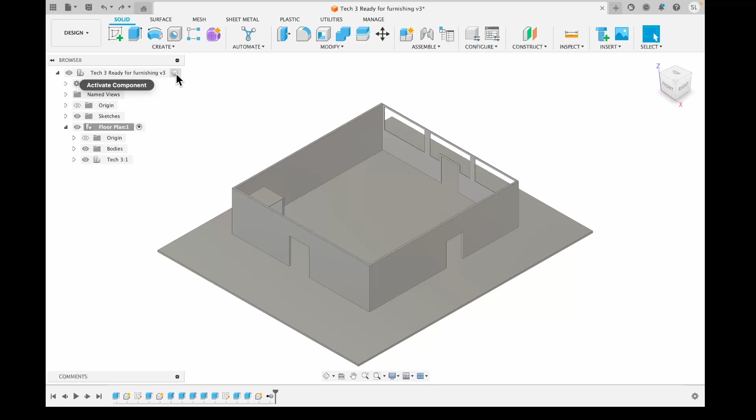We want it to be its own separate thing. So I'm just going to undo that real quick. Select this top button here, and that's when you're going to press new component. I'm going to call this first one desk.

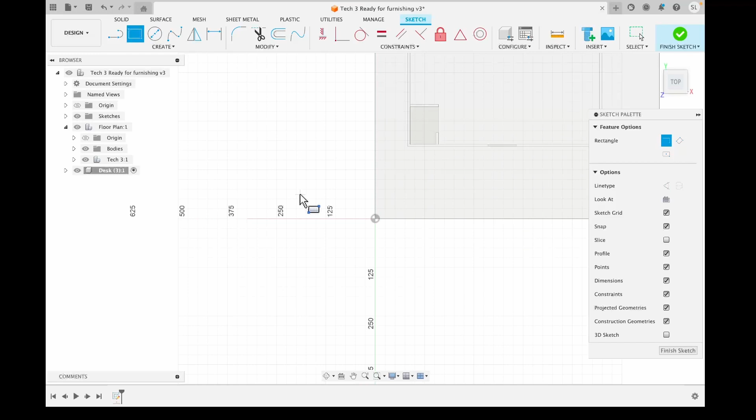Now it's its own component, and I'm going to start making a sketch from the top. The dimensions for the desk I'm going to make today, with a 2-point rectangle, are going to be 36 inches by 42 inches. I'm going to extrude that by 31, so I'll press the letter E, select my shape, 31. That's it for the base.

Then I'm going to put the tabletop on top of it. So I'm going to create a sketch on top of my table. I'm just going to do this so you can see better.

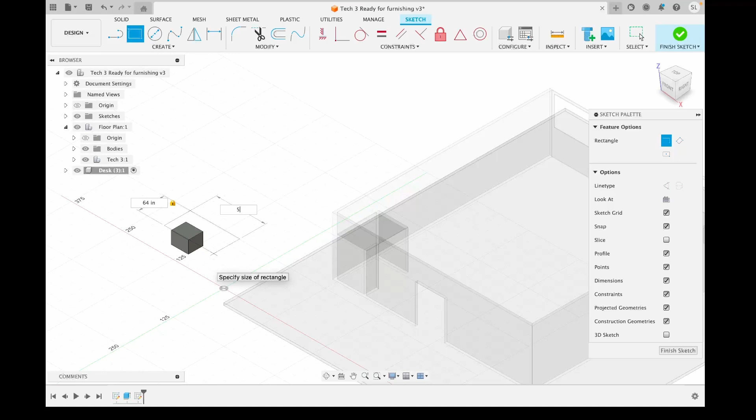I'm going to click a 2-point rectangle and draw a rectangle on top of my base. I want the long part of the table to be opposite the long part of the base—that's how the table actually looks in real life. On the longer part, I'm going to make that 64 inches, and this opposite side here is 54. So the longer side is going against the longer side of the base, so it's going to look like that.

Now I just need to use my dimension tool to position it where I want it. Notice how when you use the dimension tool, I have one side overhanging and the other side going in—there's only one way to do it. If I do the short side, it's going to push it further in. I'm just showing you what not to do here. If I push it 6 inches, I'm still on the wrong side, so you need to be dimensioning from the opposite side to get that 6 inches.

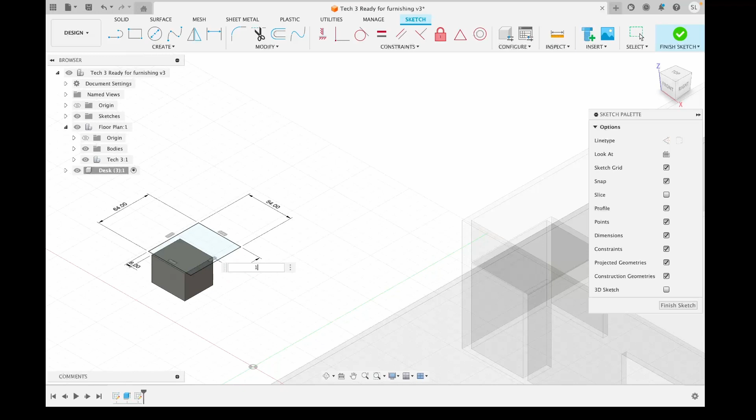The same thing here—that dimension is going to be 14 inches. So in other words, the overhang is 6 inches on this side and 14 inches on this side. If you look at it from the top view, it should just look symmetrical, sort of like that.

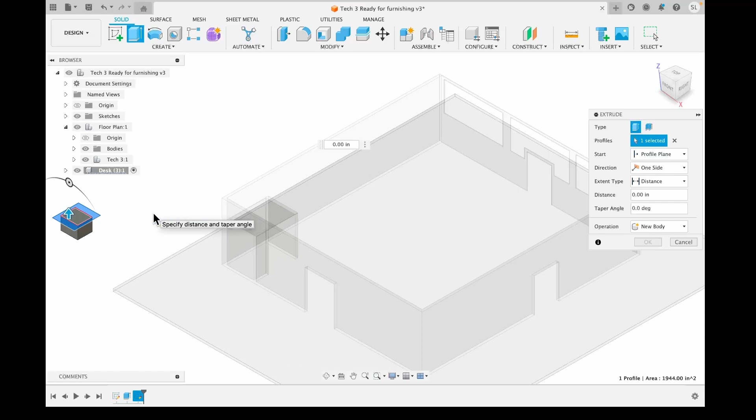When you're done with that, you can extrude it, and don't leave that part out, otherwise you'll have a silly looking table. Make sure you select all the parts of the tabletop and bring it up by 2. So that's really all there is to it—the table is pretty simple and straightforward.

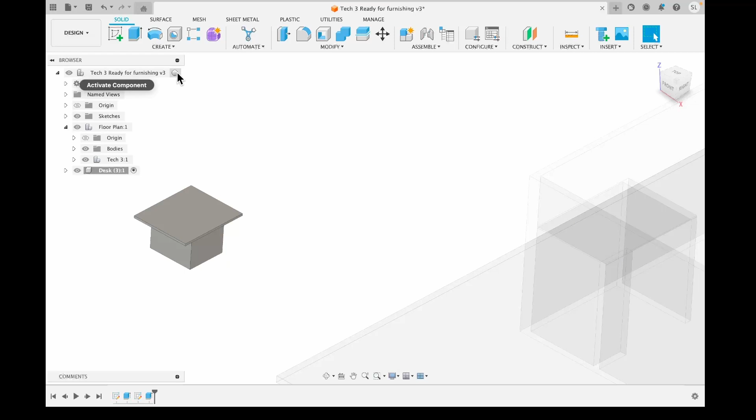Let's start working on the chairs. The chair is a little trickier than the desk. I'm going to start the same way: change your selecting tool up here, press new component, and type in chair.

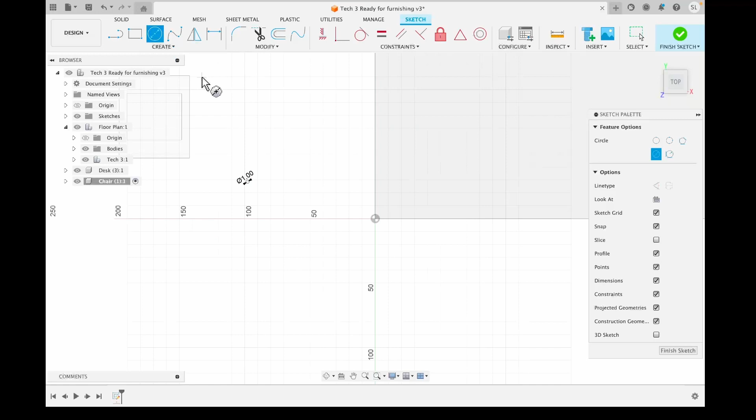When you make your chair, you can just select the slab for the top view, that's fine. Notice the size of the table—you don't want your legs super spread apart, with one leg of the chair way over there and the other way over here. You want them relatively close, kind of like how it is in real life on a chair, because when you set the dimensions you don't want them all over the map. Just get them kind of close—it doesn't matter if they're perfectly lined up or not. Just 4 circles in the rough shape of a square should be fine.

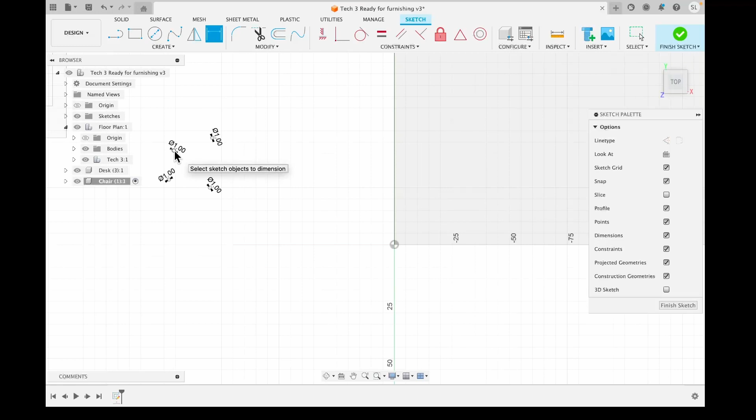After you have your 4 circles, we're going to press the letter D for dimension and start setting some dimensions here. I want 7 inches from each leg to the leg across from it and to the leg vertical to it.

So I'm going to select those two legs, and make sure that your arrow is straight. Don't have something like this where your arrow is crooked, because you're not trying to tell the distance between those two legs at an angle. You're going to say you want the height between those two lines vertically to be 7 inches.

I think it's a little bit easier if you do the two vertical sides or the two horizontal sides first. So I want those two to be 7, I want those two to be 7, and then I want my two bottom ones to be 7. Again, make sure you're not doing this - keep those arrows straight. 7 and 7.

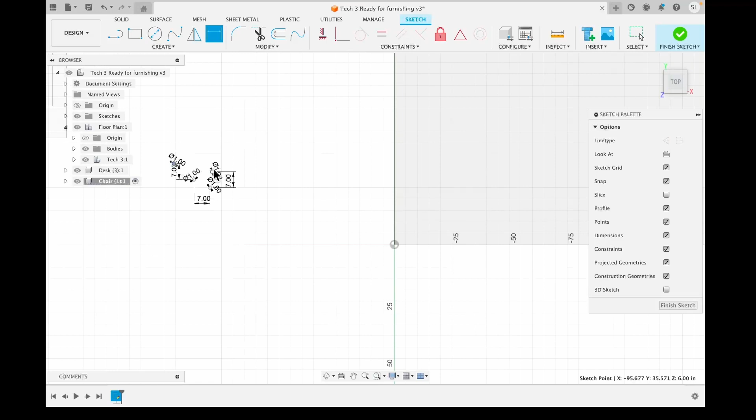Now, if it looks like this, then that is totally fine. We can clean this up a little bit by moving these arrows somewhere where it's a little less messy to look at. That's fine if you want to do that.

So you're going to go up to this upside down T here that says horizontal and vertical. This is going to let you snap two lines into one vertical plane, right? And it's going to let you snap two horizontal lines to a vertical as well, or a horizontal.

So with that selected, I'm going to select these 2 points. Watch what happens - boom, it snapped it to the same vertical line. Now I'm going to do the same thing from here and here. So I said I want that to be horizontal to that, and it just made that completely square.

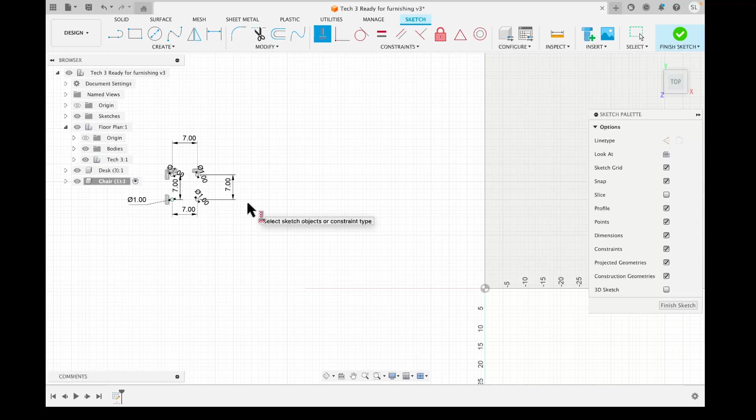If you got to this step and it still looks a little wonky, feel free to escape out and delete one of your circles, and when you put it back in, just make sure that it's a little bit closer to where it should be in real life. That will take a lot of the confusion out when it comes to actually getting these where you want them.

If you got this far, we're going to extrude our circles. Select what you want to bring out, and you can select more than one. So just select all 4 and bring them up by 22.

If accidentally you only selected one and you brought it up by 22, the other 3 are going to disappear. You can always fix that by going down here to extrude, selecting it, and clicking your other 3 legs also. Make sure all 4 are blue, and then press OK. Then you should have all 4 coming up.

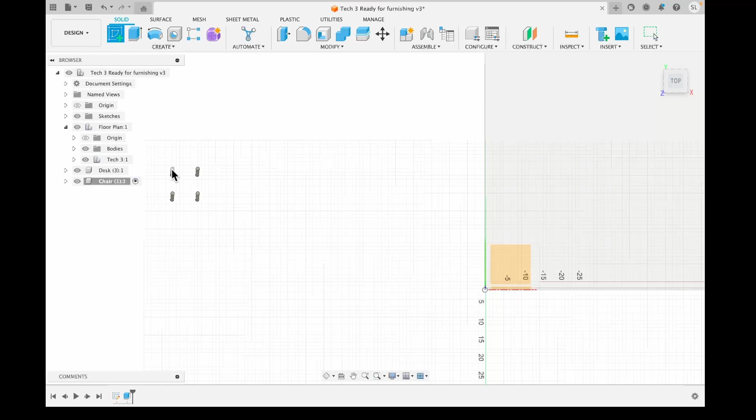From here, I want to make a new sketch on the top of those legs. I'm going to create a sketch right here. From this point, we're going to select the line tool, and we're going to make a line from the middle of one leg to the middle of the leg on the opposite side, diagonally.

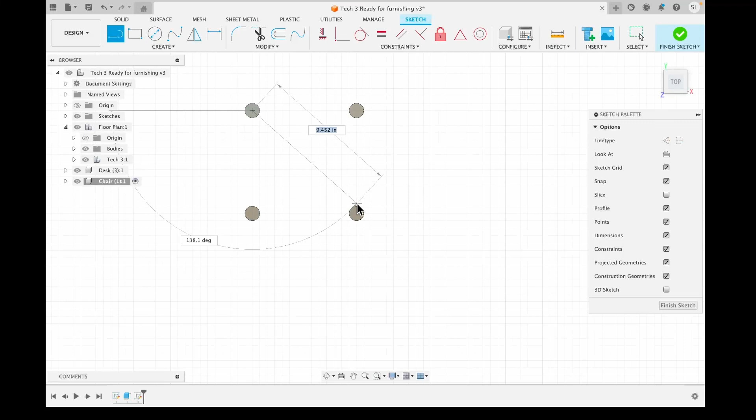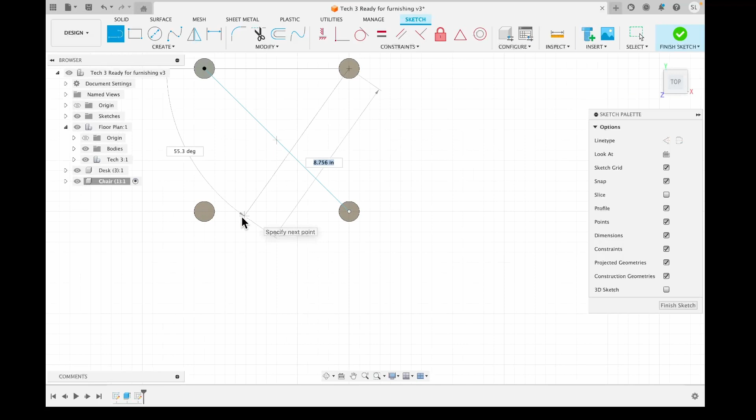And then it's going to try and get you to continue making one. You can press escape here to get out of that. Press the line tool again, and you're going to go from one to the middle. If it's not letting you snap in, and sometimes it doesn't let you snap for some reason, feel free to just zoom in and get as close as you can. Even if it's not perfect, just get close.

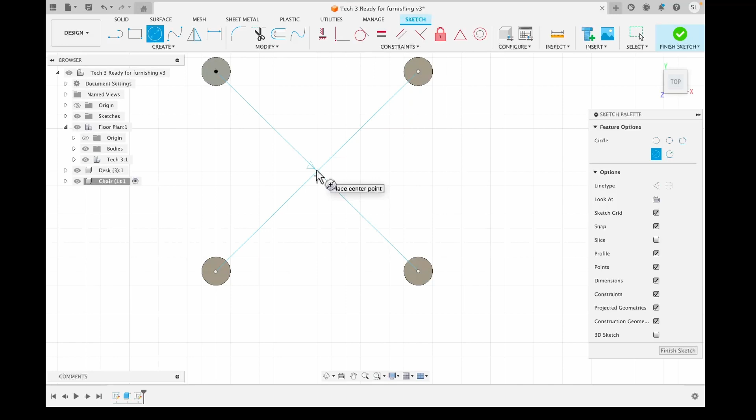And so you should have an X. That X is going to be the center of the entire chair. From here, you can select the center diameter circle and go right to that point. A lot of people look at this and say, hey, every time I go right to that point, my cursor moves. That little triangle shape right there is just letting you know that you found the middle and you're in the middle. So just click that and you're okay.

And you see it starts from the middle. Make that 14 inches, because that's the diameter of the seat. 14 inches. And so from here, you have the seat. Double check yourself, make sure it's on the top and not the bottom, like this.

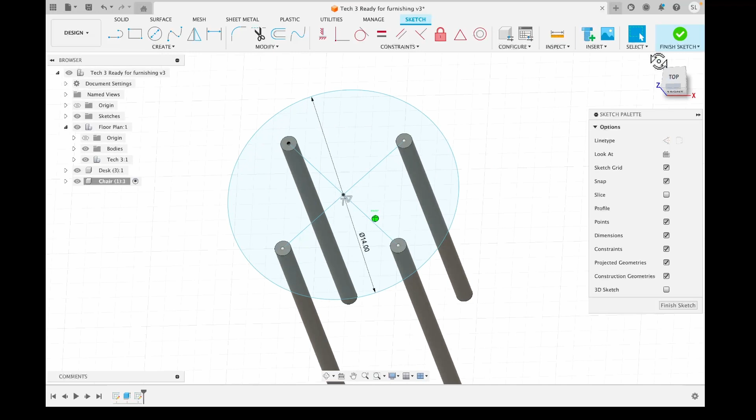And now you can extrude that shape, okay? We're going to make that go up by 2 inches. Don't leave this out. You don't want a holey chair. Select that too, and press OK.

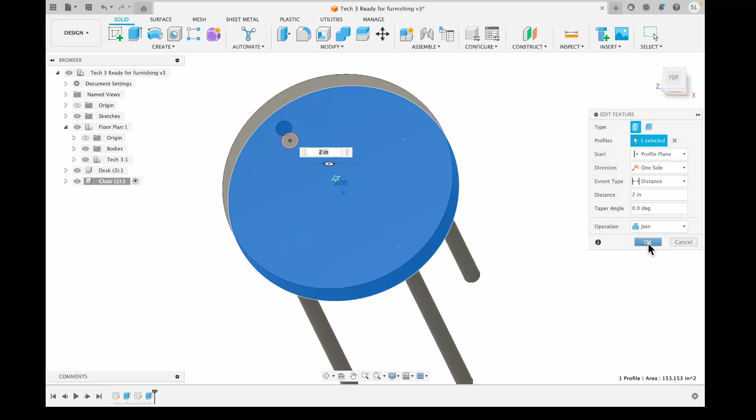And again, if you did this and you left that hole in there, so there's a hole in the chair, you can always go back to your timeline, select your extrude function, select the hole, and you can get that hole out of there. Okay, so you made your table and you made your chair. The next step is going to be positioning these inside the room, okay?

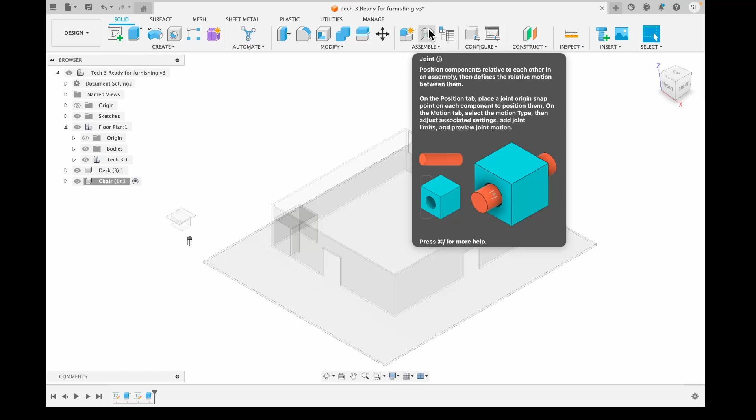So what we're going to do is we're going to go up here to assemble and we're going to click the joint button. The joint button is going to allow us to connect one part to another part. Okay, we are going to go over here to the table and pay extra close attention to this, guys. This is a very important step.

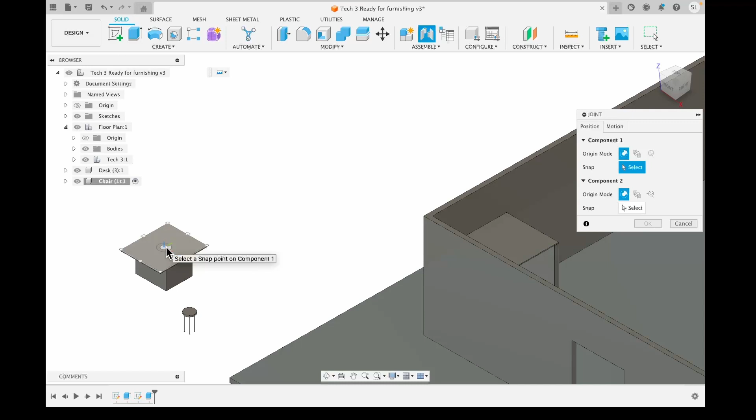Notice how here the circle is laying flat. Like here on the floor, it's flat. Here on top of the table, it's flat. It's looking from the top down. If I did the side, it's over here on this side, and conversely, it could be over here on the front. Especially in the corner, it can be all kinds of crazy things.

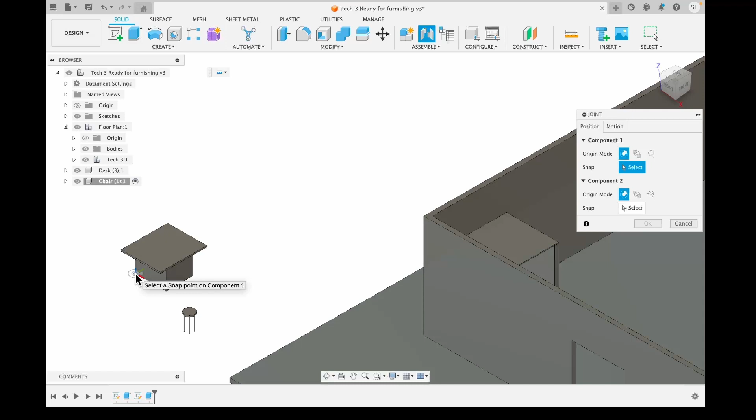So make sure that you're selecting the same plane from what you're trying to connect from and what you're trying to connect to. I want this corner flat, like on the top down, to be connected to the inside, not the outside, the inside. So notice, remember, I have that little line there on the inside of the room. Okay, so I'm going to select that.

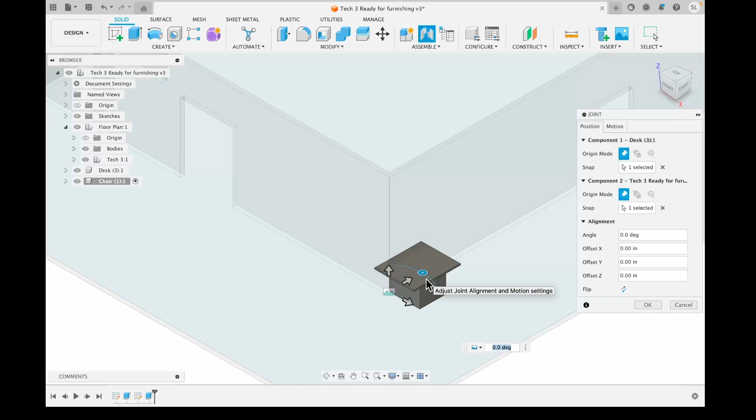And if you didn't do that right, your table might be upside down or wacky. So feel free to just escape out of that and try that again. This circle can rotate, okay? And notice that it's rotating by degrees. If you want to keep it even, you can keep those numbers at 90, 180, 270, and that'll let it rotate in without being crooked.

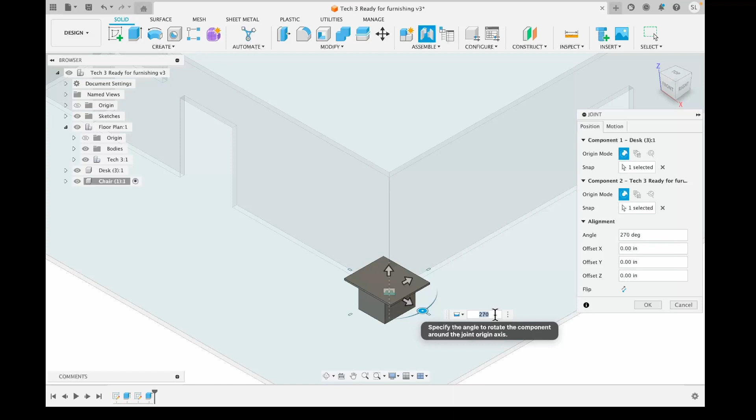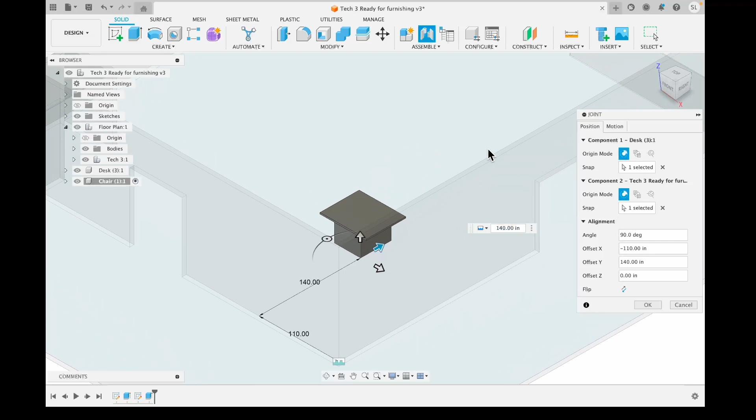So I'm just gonna make that 90 degrees. And you can also rotate to 90 degrees. And from here, you're just going to be dragging those arrows to get it where you want it, okay? And so you're going to position it to where it is in the room, and you'll press OK at that point, all right? So you got your table where you want it.

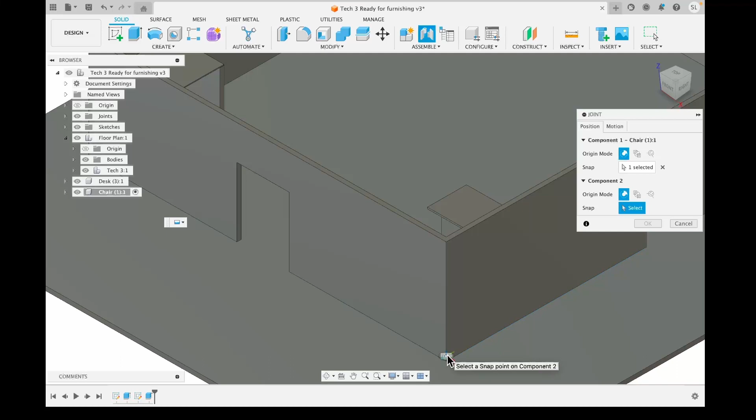I'm going to do the same thing to the chair. I'm going to press joint. I'm going to select the bottom of the chair. I'm going to position it to the corner of the inside of the room, and then you're going to drag those arrows just like you did before. So you can do it backwards, forwards. I'm going to put it right by the table and press OK.

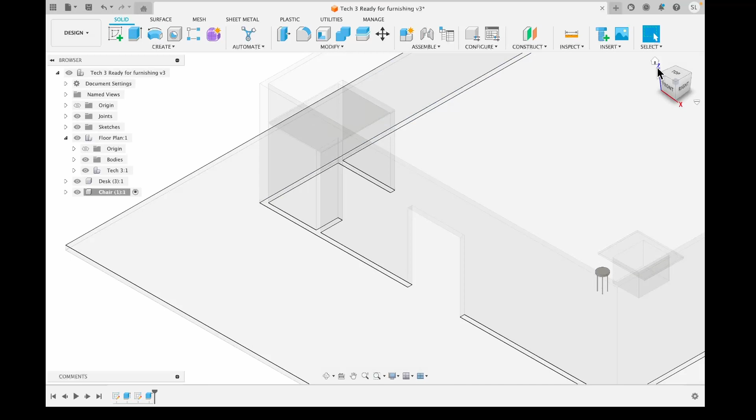All right. Now, notice we only have one table here, and we need 6 tables and 6 chairs to be complete with this assignment. So what we're going to do is we're going to go over here to where it says desk, and we're going to right click it. Okay, we're going to press copy. And so we can actually copy the desk.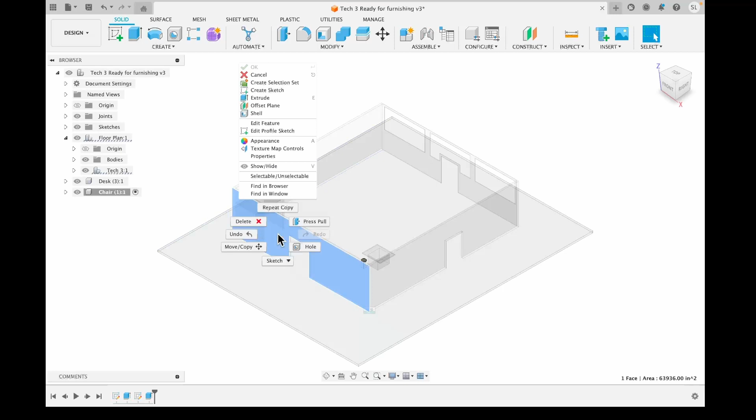And now it's not going to let you do this if you select the wall or something and you try to paste it. It's not going to give you the option to paste. So make sure that you're doing this into the white part over here. Go ahead and paste new. Paste new is going to make sure it's a new component. If you just do paste, it's not going to give you a new part. I'm just going to undo that real quick. Paste new.

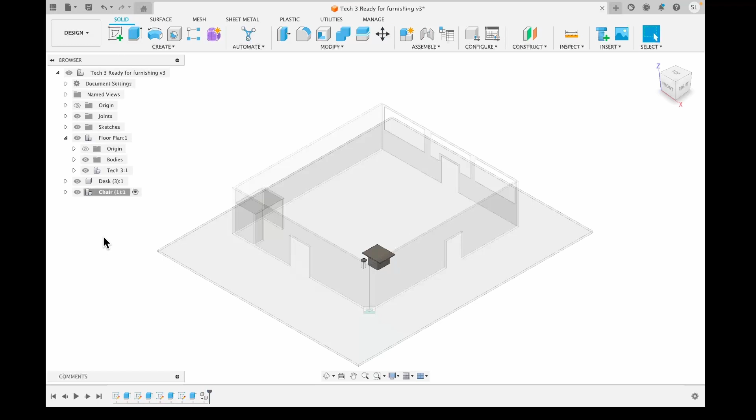And from here, you should be able to maneuver that where you want it. Okay. So you can move it where you want it now. And so you're just going to continue this until your Fusion 360 matches what you have in the room, roughly. Do your best to get it as close as you can. Get all 6 tables and all 6 chairs. And when you're done, take a screenshot and submit it. Good luck.